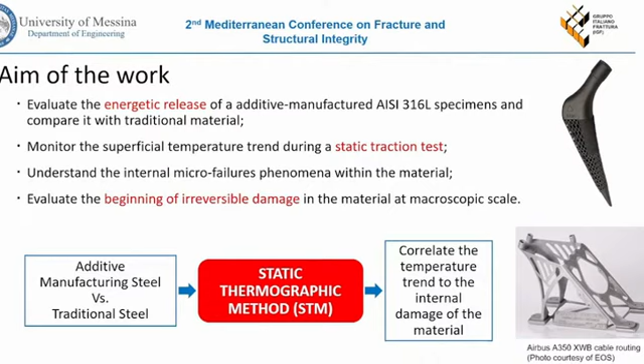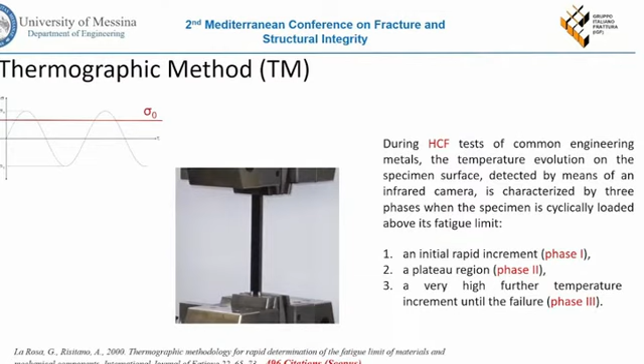We make a comparison with an as-built additive manufactured material, because additive manufacturing nowadays is adopted to make a final part. So we want to assess the mechanical properties of such materials as built in order to make a final product in a rapid way. According to the classical Risitano thermographic method, we can evaluate in a rapid way the fatigue behavior of material.

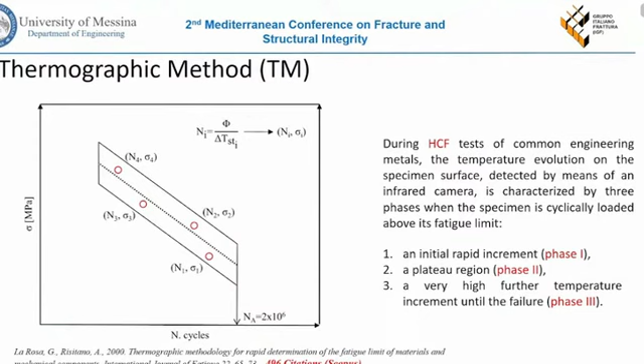So, according to the Risitano thermographic method, we can assess in a rapid way the fatigue behavior of engineering materials, both metals and polymers, by measuring the thermal trend of the specimens stressed above their fatigue limit. So we can rapidly obtain information on the fatigue limit and on the overall SN curve.

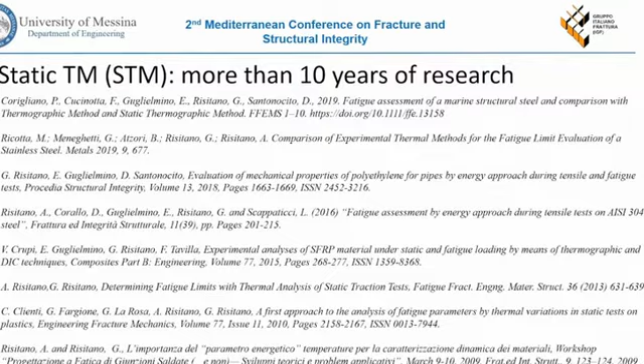A new infrared thermography application is the static thermographic method, according to which during a static tensile test we have 3 different phases in the temperature trend. The first phase with a linear decrement of the temperature according to the thermoelastic law of Lord Kelvin. Then the temperature deviates from linearity in a second phase. And finally, in a third phase, we reach an overall macroplasticization state until the failure of the specimens.

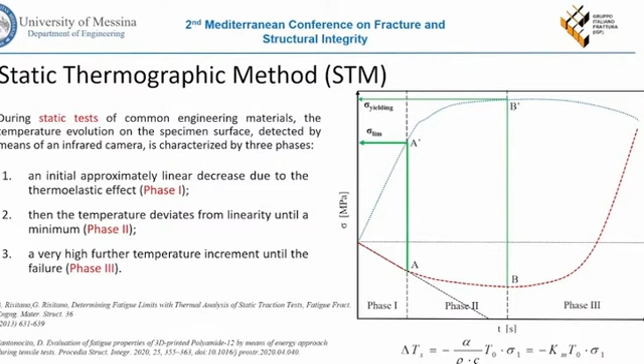So if we are able to assess the transition between the first phase and the second phase, we can correlate this macroscopic stress with a damage stress that introduces in the material the first microplasticization.

In our work, we tested 2 kinds of materials, the traditional stainless steel and the additive manufactured stainless steel, with the same specimen geometry, using a servo-hydraulic load machine, and we also monitored the temperature with an infrared camera. For the selective laser melting steel, we adopted a laser power of 230 watts and a laser scanning velocity of 1400 millimeters per second. The specimens were built along the Z direction, and the static tensile tests were performed under stress control.

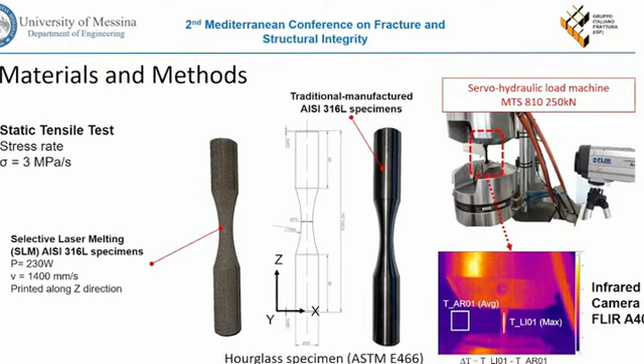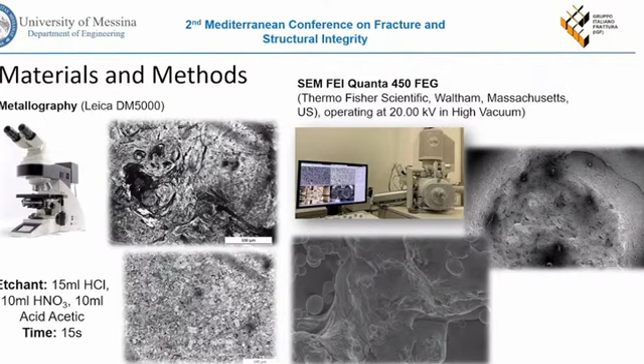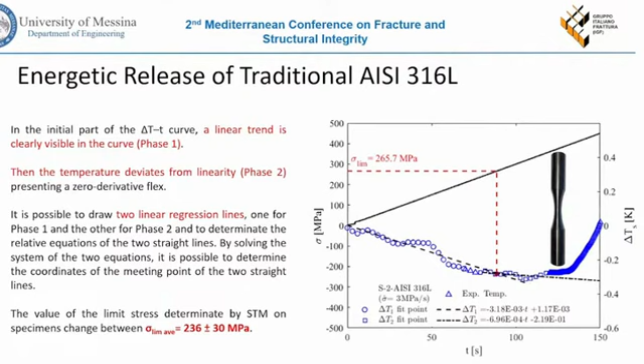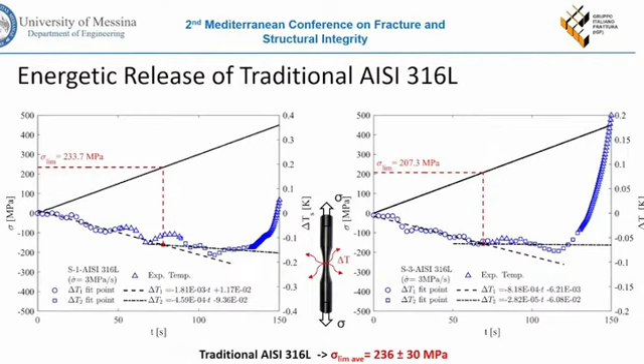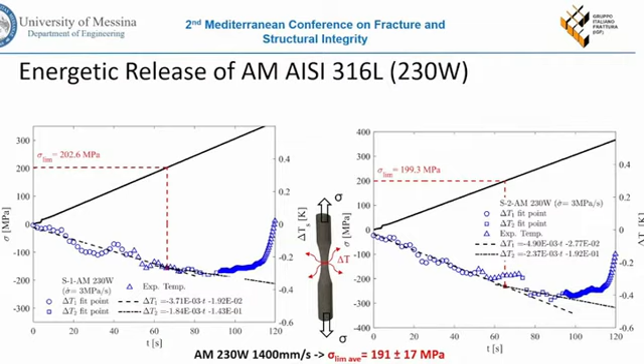Here we report also the other static tensile tests performed on the same steel. And here I report the tensile test performed on the additive manufactured steel. We can see how the limit stress is considerably low compared to the traditional material. In this table, I report the ultimate tensile strength and the average limit stress of the materials.

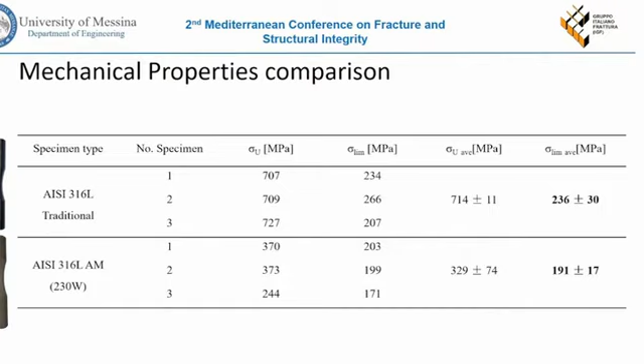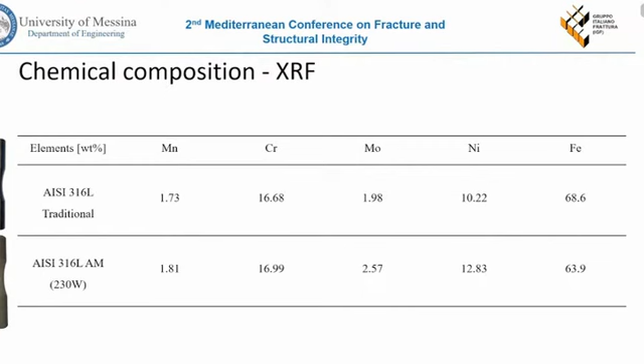Moving to the failure analysis, the chemical composition analyzed by XRF is the same for the additive manufactured material and the traditional material. Performing the metallographic inspection, we can see on the left side how the additive manufactured material has macroscopic defects compared to the traditional counterpart. Analyzing the microstructures, the traditional specimens exhibit a classical austenitic composition, while the additive manufactured specimen, tested with the same etching procedure, did not show any particular microstructure.

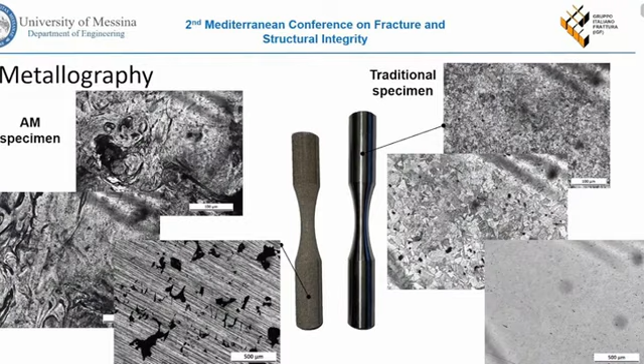Analyzing the fracture surface with the SEM, the additive manufactured material exhibits a brittle fracture surface under static tensile load and several macro defects such as unmelted powder. On the other hand, the traditional material exhibits a very ductile fracture surface with small defects compared to the additive manufactured one.

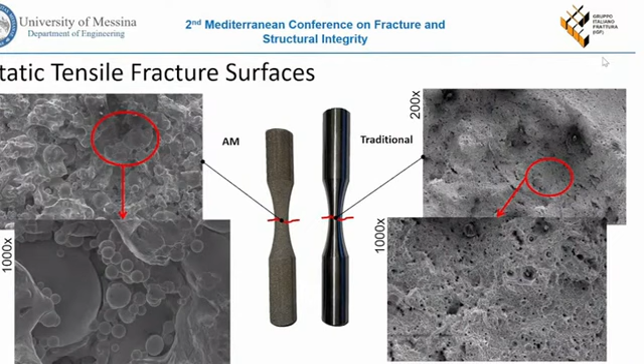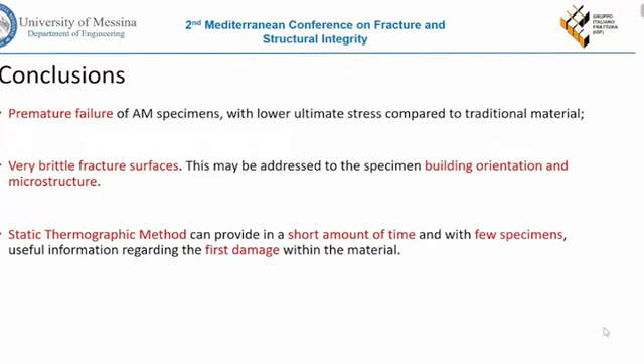In conclusion, we have a premature failure of the additive manufactured specimen with a lower ultimate stress compared to the traditional material. It also exhibits a very brittle fracture surface, and this may be attributed to the specimen building orientation and microstructure. We also assessed how, with the static thermographic method, we can obtain usable information about damage initiation in the specimens with a very rapid static tensile test.